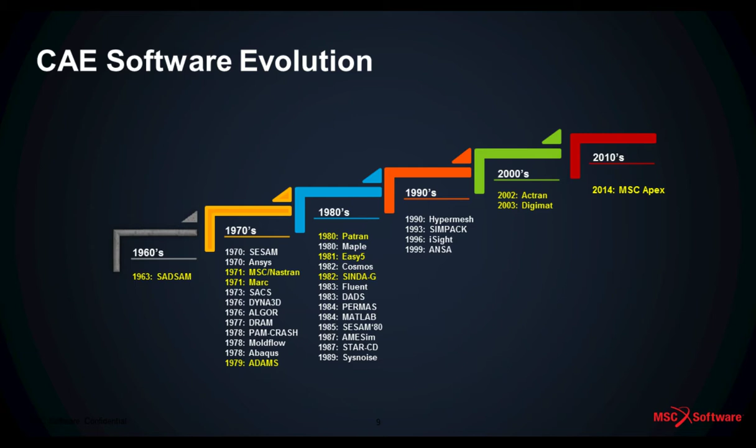So what we did was launch a worldwide trend survey. We went out to our customers—Ferrari in Italy, Honda, Toyota in the Far East, NASA, Airbus, Boeing. All these guys have been using our tools for 25-plus years, and we said, tell us two things in 13 different languages: what you like about our software that we should keep, and if you were to create a wish list of what the best possible finite element analysis software would be, no matter how crazy, tell us what it looks like and how it works, and we'll do our best to build it. We got a very passionate response in 13 or 14 different languages worldwide.

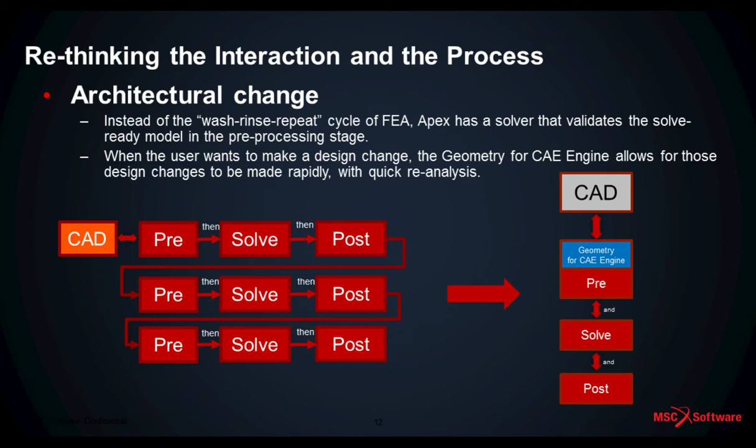Okay, and that's really what Apex is. The moment you bring in CAD into Apex, it automatically knows the location of every hole, every line, every fillet, every surface, everything. And it knows the dimensions of everything, which makes it completely generative. The moment you assign a mesh to it, the mesh optimizes for the geometry, again, without you even having to do anything with it.

And these are the things that you can leverage modern day computing for.

Now, this is not our first release that we've had. We have been waiting for the product to get to a maturity level where we could really reach out to the oil and gas and offshore industry and say, you know what, if you build a large fabricated structure, this is the tool for you. And sure enough, now we are there, and hence why we're giving you this webinar today.

The beginnings were really that modeling and meshing portion, that really big pain point of, you know, I'm paying my engineers to do engineering, not modeling. That was the first couple of releases that we focused on. And even within that, we focused on the 2D mid-surfacing and meshing, shell meshing workflow.

The next complaint that we addressed over the course of 3 releases was, all right, why am I paying my engineers to do a basic linear static or normal modes analysis and it takes weeks? How can you turn that down to hours or at the most a day or 2? And we said, okay, you know what, we could do that too. And sure enough, we did.

And so here we are now that we have an entire suite of analysis tools capable for you. We have linear dynamics, we have linear buckling, we have interoperability with Nastran, and we have composites, we have orthotropic materials, basically anything you would need for a large fabricated structure we have.

So what is Apex Modeler? Apex Modeler is the CAD to mesh solution. This is the pre-processing standpoint. We license it two different ways. We have Apex Modeler and Apex Structures, so it's a little bit cheaper if you just do the pre-processing portion of it, and then you can move to whatever solver you choose.

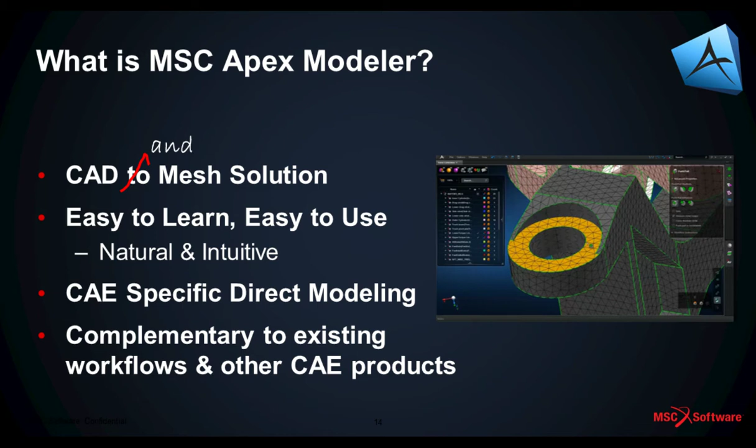The biggest takeaway from this slide is that Apex is easy to learn, easy to use, natural, and intuitive - 4 things that have traditionally never been associated with finite element software before. If there's one takeaway from today's presentation, it's that James is far too excited about finite element analysis than any other human probably should be. But the second takeaway would be those 4 things: Apex is easy to learn, easy to use, natural, and intuitive.

One of those things about being easy to use and easy to learn is the fact that Apex is completely self-taught. There is no training class associated with Apex. You pick it up, and within hours you're off and running, picking it up yourself. Me personally, I came from Altair, and I came from the HyperMesh workflow where you took 2 full-day training courses just to learn what the left mouse button does and the right mouse button does.

And we said, okay, let me put this to the test. Within 4 hours, I was ready to go. And part of that is the fact that we have smart tools. The moment you see the demonstration today, you're going to see that a vast majority of tools are gone - they've disappeared because we've integrated that technology into Apex.

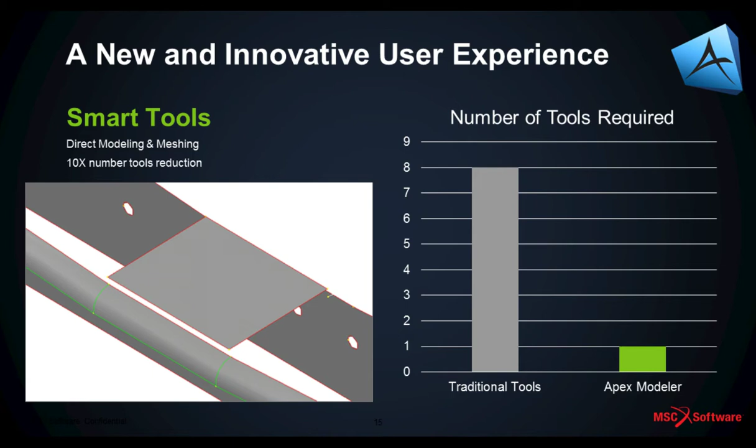In the image you're going to see here, what happens when you join those 2 red lines to get that fillet connected to that top surface? That traditionally took 8 different tools in our legacy tool. We said, let's throw down the gauntlet here, let's figure out how to make that faster and easier. And sure enough, we did. In Apex, it's just a drag and drop operation. So 8 tools down to 1 - a 10 times reduction in the amount of time necessary.

Now, Apex is self-taught, I already told you about that. Let's put our money where our mouth is. We went out to our customers worldwide and said, let's put this to the test. Here is an audio package - what you're seeing is a plastic enclosure for 15-inch subwoofers. So you can imagine there's a lot of vibration, a lot of structural loading that goes through this thing, and cracking and consumer product quality is of utmost importance to this customer.

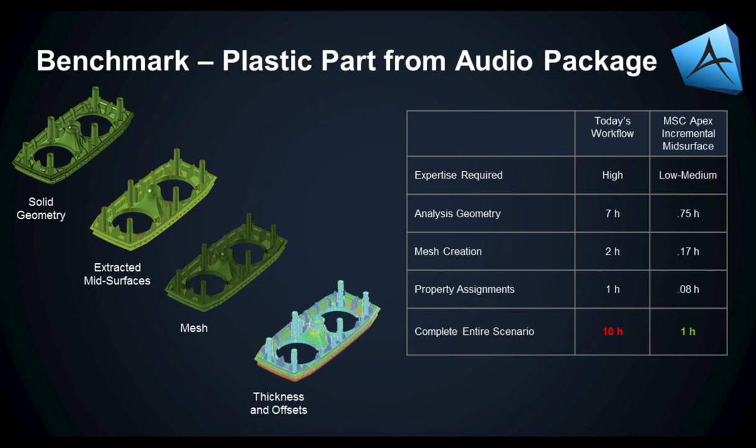We said, if you were to build a mid-surface, how long would this take you? For their best engineers, it took 10 hours. In Apex, it took 1 hour. So there's your 10x return in pre-processing time.

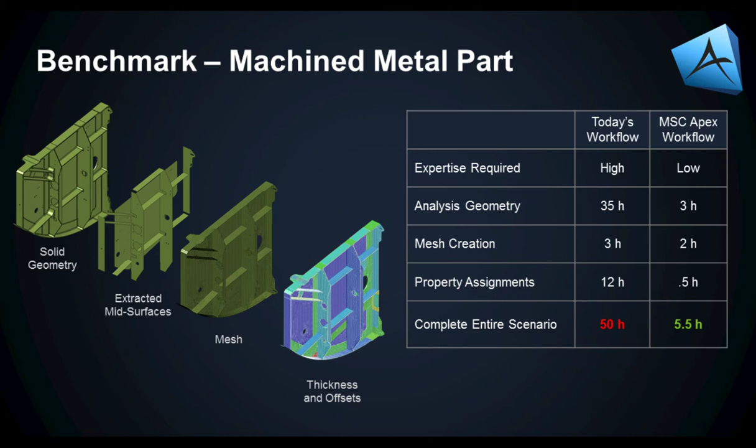Here's another example - this is a machined metal part for one of our customers, where you go from solid geometry to mid-surface. This took over a week in their current workflow. Switching over to Apex, it took less than a day, almost half a day.

Now, you may be thinking, what does this pre-solve-post workflow look like? Well, we import all the major CAD formats. We also import Nastran legacy bulk data files. But when you're making geometry changes inside of Apex, testing your engineering intuition and whatnot, you can go directly into the bulk data file, or you can spit out your changed CAD format in ACIS, Parasolid, or STL, and go right back into your CAD format to do the full loop.

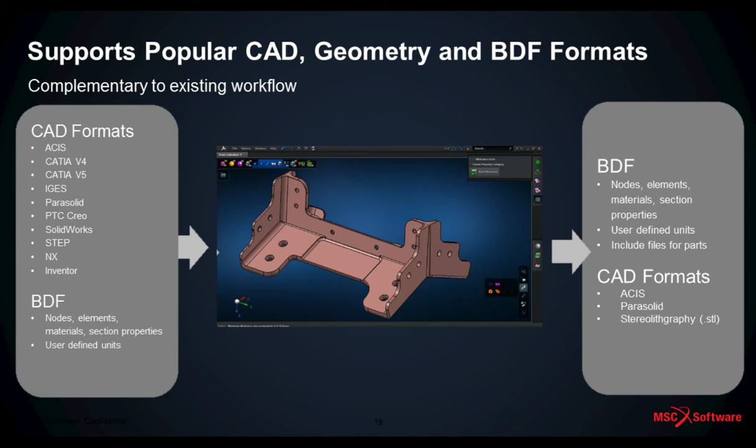So let's say you added a rib, changed a fillet, or moved a fastener hole in order to make your structure more structurally sound. You can go right back into your CAD system, change your drawings, and go straight out to the manufacturing floor with that changed design - so you're not locked in within the Apex platform.

Now, Apex Structures is that second half - that is the solver and post-processor. This is where you can really test out your engineering intuition and see back-of-the-envelope loads and calculations in a matter of minutes instead of hours or days.

The 4 technologies we have today available - new stuff is coming out almost every day within the Apex platform - are linear static, normal modes, linear buckling, and linear dynamics. It's completely integrated and generative, which you'll see part of the demonstration today: going back and changing the design after an analysis has already been done, which we do on the jacket assembly.

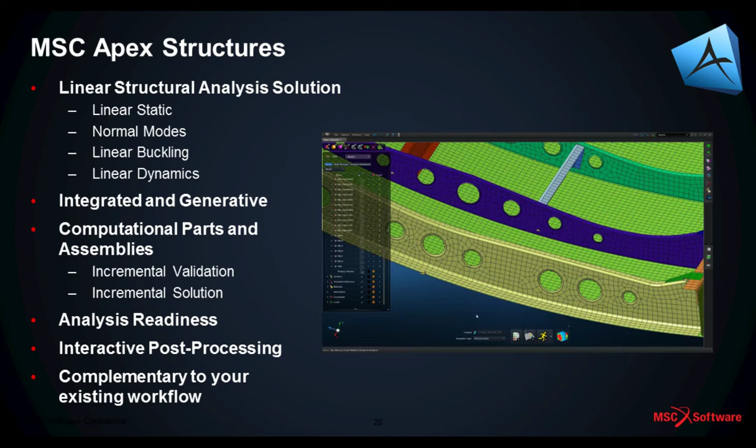Computational parts and assemblies allow for that generative and integrated platform to work because you have things like incremental validation and incremental solution. Gone are the days where you cross your fingers after spending weeks building a model, hoping it actually runs, then spending 2 or 3 days debugging your model just to get something runnable. You don't have to do that anymore inside of Apex. In fact, that was one of the things we set out from day one to fix - incremental validation and incremental solution. It's so easy that you'll see in the demonstration, and you'll really love it.

And with that, let's go straight into the demonstration.

For the first demonstration, I'm going to show you a little bit about the Apex platform before we jump into the actual demo. The moment you open up the tool, you find this pop-up window with over 250 videos built in for every single functionality inside of Apex. Now, if you need video number 238, do you have to watch 237 videos first? The answer is no. This is really just there for reference.

Let's say you wanted to do a 2D representation of a 3D solid, or a mid-surface. All you have to do is hover over the tool, and you get a little synopsis of what the tool does, plus a video icon. Click on it, and it brings you directly to the filtered list of videos specifically connected to the mid-surfacing workflow. There you go, right at your fingertips.

Now that applies to basically everything. Let's assume you want to import some geometry and do some cleanup on it - you have the exact same capability. The idea is that at every stage, from the easiest to the most advanced analysis workflow, you basically have an MSC virtual assistant sitting on your shoulder, giving you tips and tricks along the way. At no point should you feel left out in the cold and all by yourself.

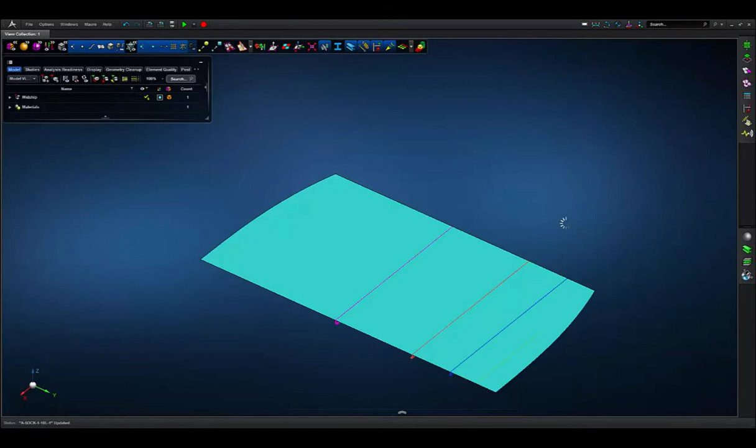So you can skip that stage in your finite element model building process. What we're going to do is play a macro that's set up to read in the two-part export from my Intergraph model. Going through this, for a section of my part, if I go to all files, you'll see IGES files that have been exported - these are my geometry pieces - and an XML file showing all the metadata, like the cross-sectional area of the beams and other details. If I go back to the ship Python script, it will bring in and associate all of that data, saving me time and effort from building it from scratch.

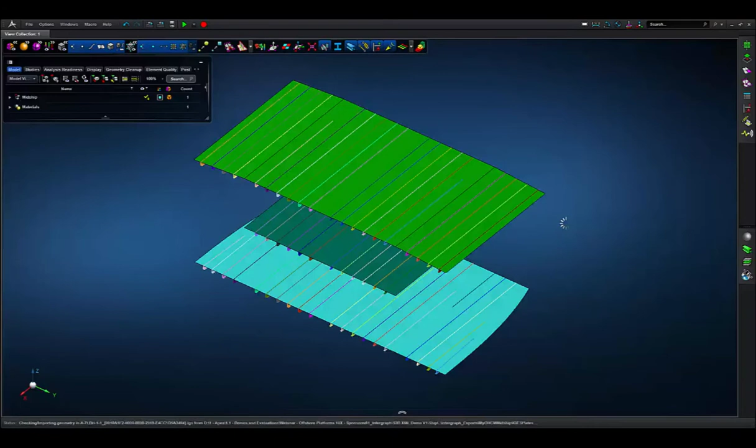While we wait for this model to work, I'll narrate and give you the play-by-play. This is creating a section of a ship, basically in the middle of what you'd think of as a freighter ship, something that carries cargo. What you're seeing are the horizontal surfaces, the sheet metal sections, stiffened underneath and on the side by 1D beam models. Both of those are used heavily in the shipbuilding and oil and gas industries, so this should be very familiar in terms of a finite element model build process. Apex excels at both 2D surface meshes and 1D beam meshes, so we thought this was a great example to show you that we handle both workflows.

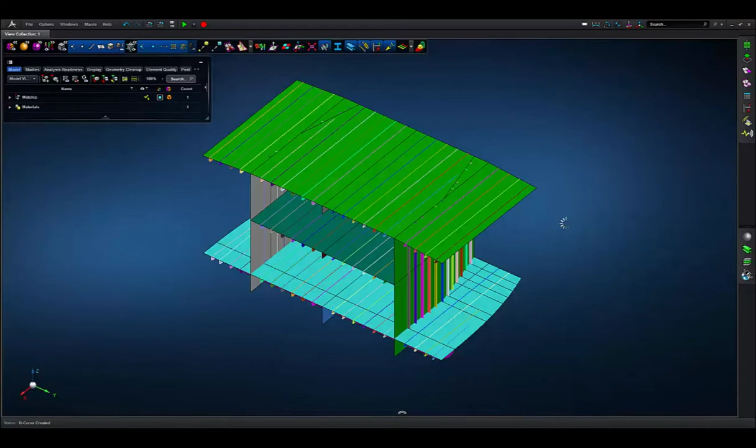I'll wait for this model to finish, and then we will go on to finishing up the model.

Due to the magic of webinars, we can just skip toward the end, and you can see that this Python script has successfully executed. I've just saved you the pain and anguish of hearing me tell jokes for the last couple of minutes.

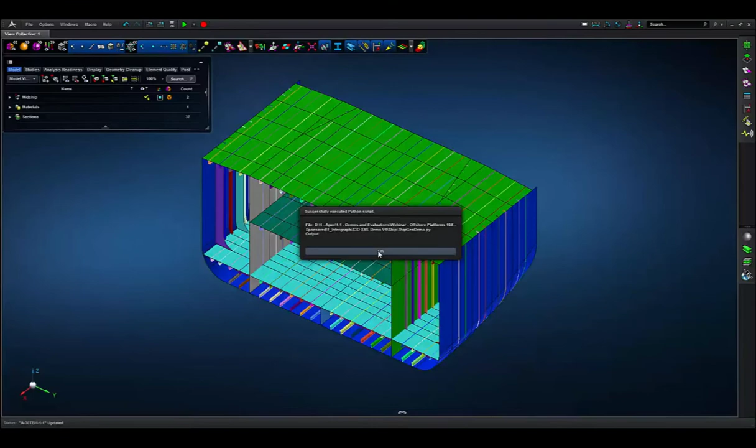The script itself only takes about 1.5 to 2 minutes to complete, and here is your completed ship hull section with 1D beams stiffening up the 2D surfaces for both the top and bottom and the sides of the hull.

The only steps left in this model building process are: first, we have to mesh it; second, connect all these pieces together; and third, assign boundary conditions. I'm going to skip that last step so we have enough time to move on to the rest of the demos.

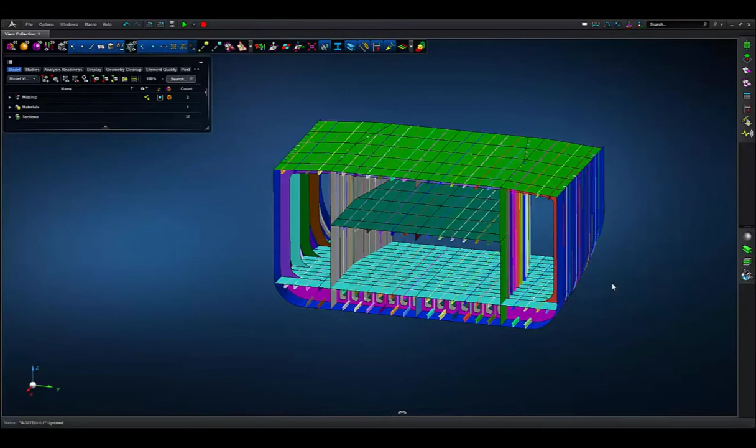I'm going to go into that meshing tool I showed before, assign a mesh of 0.25 meters, and drag a box around the entire thing. As I interrogate my model and zoom in a little, it looks like I've got a nice clean mesh.

If at any point I want to check the element quality, I can. I just go up here to element quality, and notice I have 0 invalid elements created, which means it's run ready right off the bat.

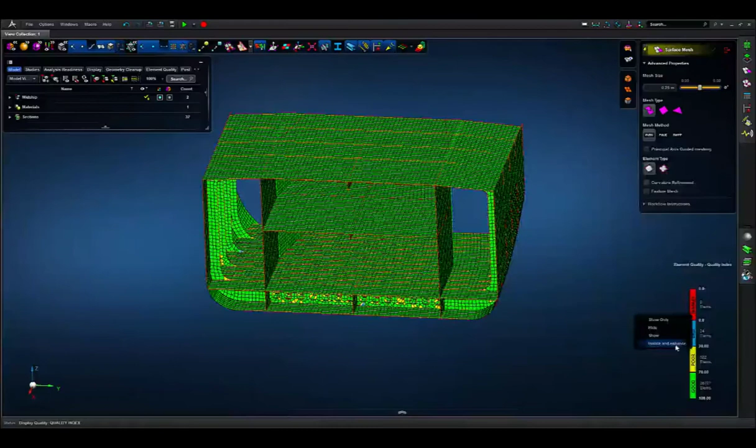If I want to see what the bad element locations are, I could do that too. I right click and say isolate and enhance, and it'll show me exactly where those bad elements are. But remember, this is completely optional because it's already run ready.

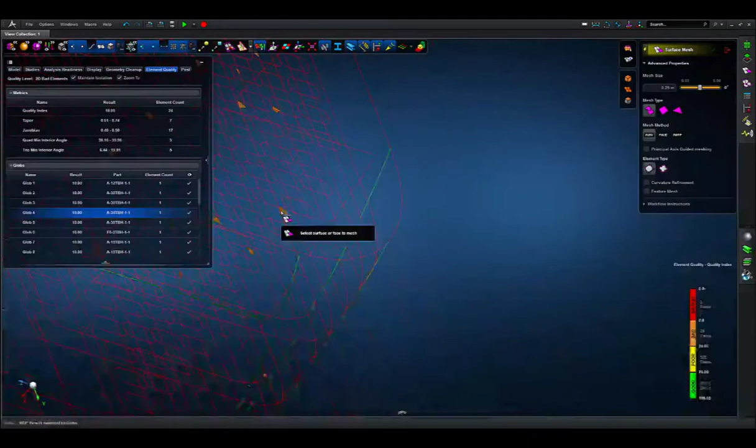If I do want to zoom to it, let's say I've rotated my model around and don't know where it is off screen, all I have to do is click through the list one at a time, see exactly where they're located, and fix them one at a time. We're going to skip this stage, but I wanted you to see that it was there.

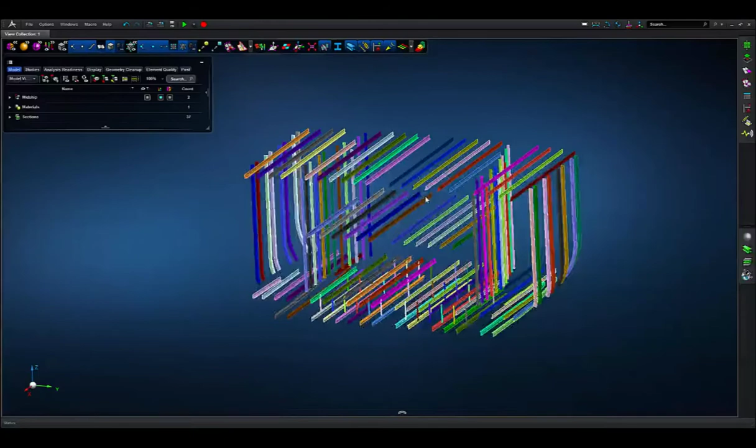Now, going back to this, the next stage is to assign the 1D beam mesh to the 1D lines, not the surfaces. Here you can see the beam spans have already been assigned to the 1D lines. I'm going to turn off the beam span so we're just left with the geometric lines.

I'm going to go back to the meshing panel and choose 1D curve mesh instead of surface mesh. Thankfully, they're right in the same place. Again, I'll use the same mesh size and drag a box around all of them.

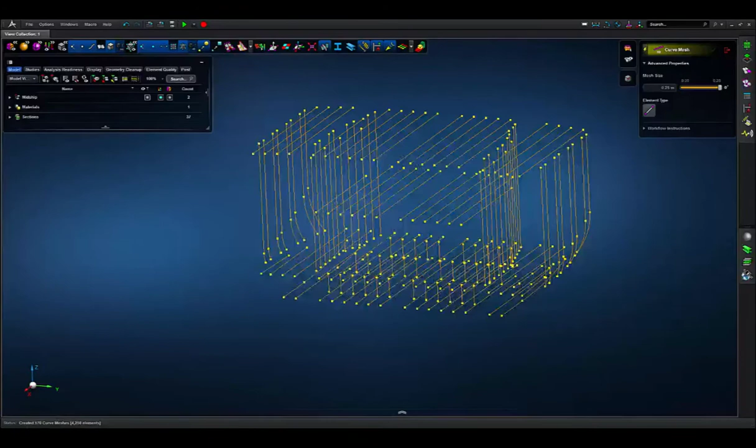Notice down here in the status bar it created 170 curve meshes, which also counts the number of elements associated with it. A nice feature of beam meshing inside Apex is that at every node location you have a cross-sectional fringe plot in post-process.

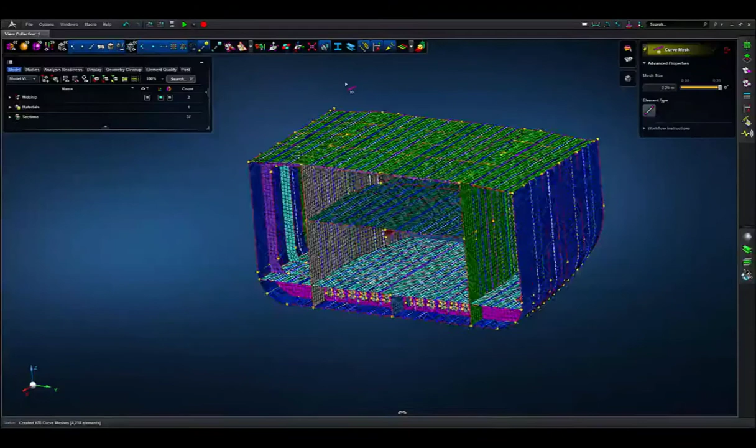The next step is to bring back our 2D surface mesh, and then connect all of these together. Now, this workflow causes considerable anguish for our users, but not anymore inside Apex because it's nice and easy.

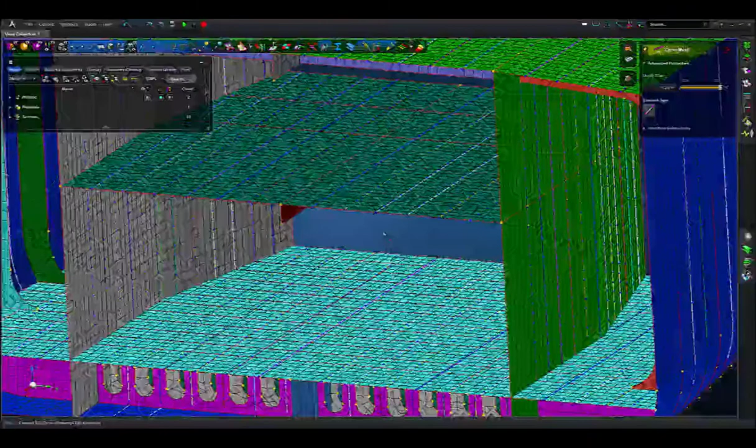Before I show you the easy workflow, I wanted to help you appreciate the effort we've gone into this. Anybody who's done this mid-surfacing workflow before understands you have to connect these one at a time to each of the surfaces, make sure they're all fully connected, and ensure all those T-junctions are correct so you have coincident nodes along every boundary. You don't have to do that anymore inside Apex.

Not to mention taking all these surfaces and beams and putting them into their own part file so it acts as one monolithic surface—you don't have to do that anymore either. You can leave it in the assembly structure you have, keeping all those sections and subsections attached to one another so you could run each sub-assembly independent of one another, thanks to Apex's solving capabilities.

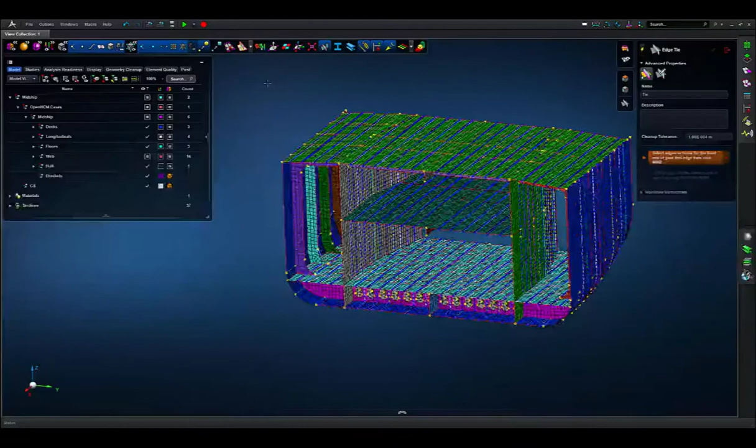Now I'm going to go to the Interactions tab, and if I go to Edge Tie, I'll drag a box around everything, and it'll automatically connect all these pieces together. This is a two-step process: first, select all the edges or faces of what you want to connect; second, select all the faces you want those to connect to. I'll let Apex sort it out by selecting everything for both sections, and it'll automatically connect it.

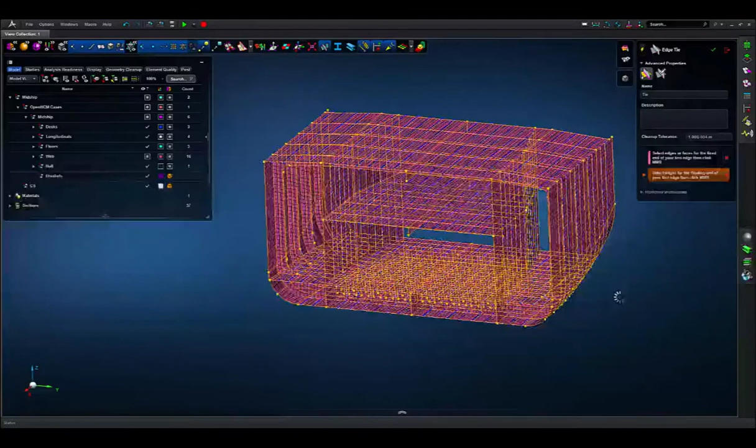As this is running, it is also editing the mesh so that it's coincident and lining up, moving each nodal location side by side so that it's nice and connected together. If I turn on my beam spans again, I can notice that each node location is lining up with the 2D surface meshes, and we are good to go.

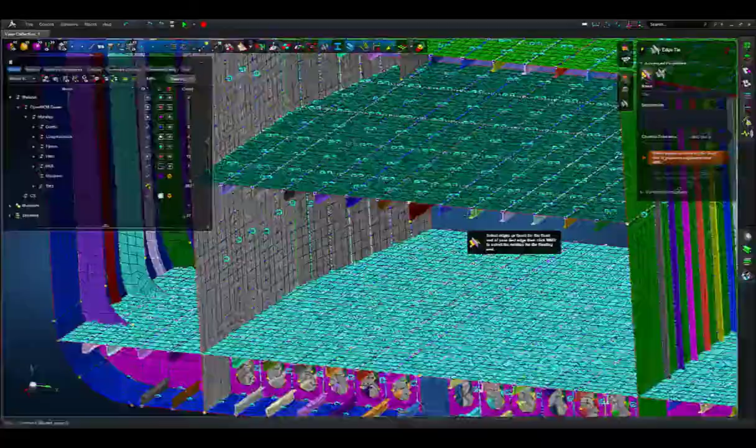All right, so now we are ready to analyze. The next step is to assign the loads and boundary conditions, and I'm just going to turn off the interaction markers here so that we don't have to look at those anymore. It's a little bit distracting to see all those little edge tie links, but that's okay. We can turn them on and off with a click of a button.

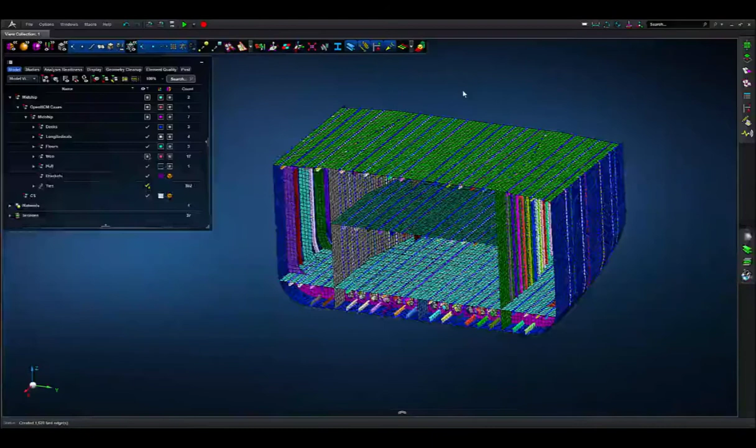Nice and easy. So the next step would be to go ahead and assign boundary conditions, which you can assign pressures, statics, gravities, dynamics, and anything that you want to do, and fully analyze at this point. So this first demonstration is complete, and we will move on to the jacket analysis.

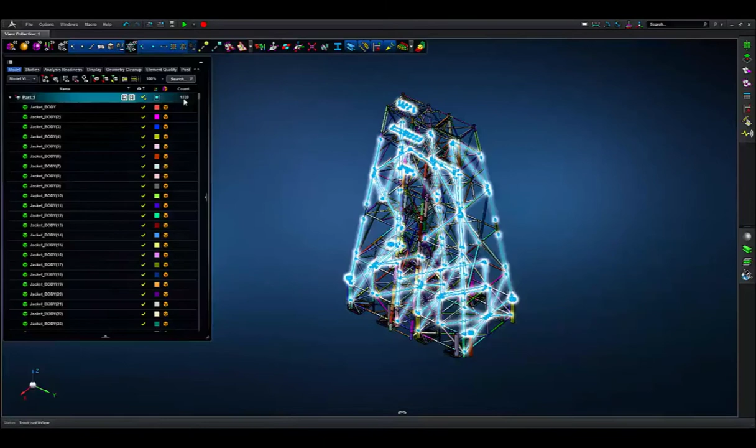Okay, so for demonstration number 2, we're going to jump into a jacket analysis, which is not without its complications. You can see that after I imported the geometry, I have over 1,800 parts here, and somehow this has to eventually act as one completely connected structure.

So the strategy that I'm going to take at this is build a little, solve a little, build a little bit more, connect that to the rest of the assembly and resolve it, and keep going until eventually I have a fully validated analysis of the entire jacket.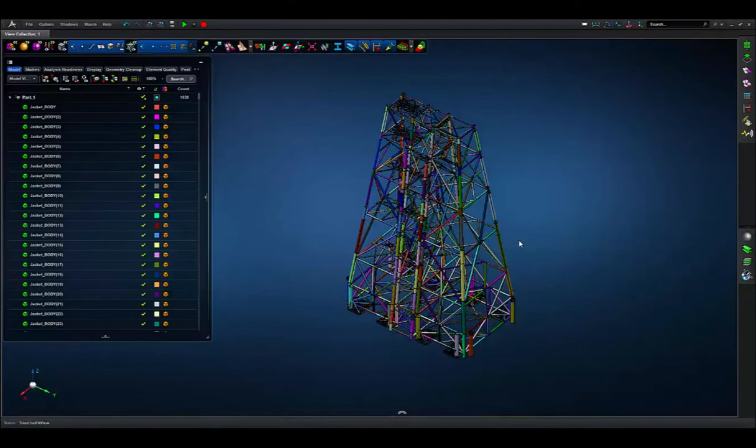So what I'm going to do is zoom into one of the more complicated areas here, where I have it looks like 1, 2, 3, 4, 5, 6 different tubes connecting to another tube, and somehow that's supposed to all connect and act as one welded structure.

So what I'm going to do is drag a box around it, and say show only, just so that we can focus on just that one section. I'm going to rotate around so that I can zoom into that location and kind of see the complicated nature of these things.

Now, the first thing I'm going to do is extract a mid-surface from these 3D solids, and there are 5 different options inside of mid-surfacing. Sure, we could do things like these are more for machined metal and stuff like that, and we can do incremental mid-surfacing, which works really well for injection molded plastic parts and castings and all that kind of stuff.

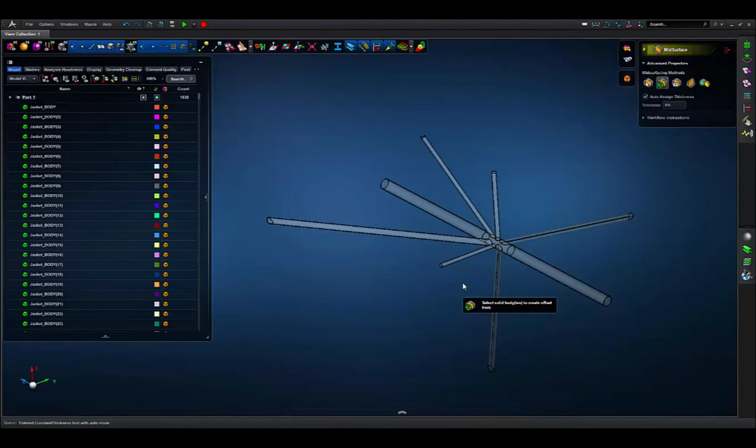But because these are extruded metal stock tubes, steel tubes that are welded together, we know that they're all supposed to be the exact same. And yes, we can click on them one at a time and notice what happens when we do. It'll extract the thickness and show the thickness range associated with that. But we're going to undo that.

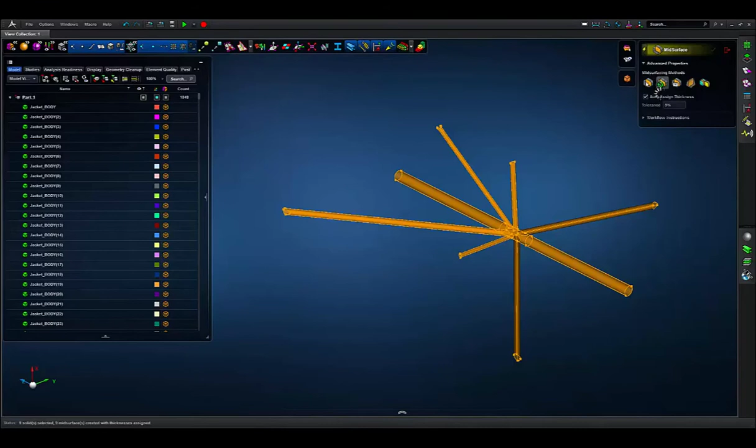Instead, what we're going to do is drag a box around the entire section here, and we're going to do the exact same thing where we auto extract and assign thickness. Notice that it just came up with 1, 2, 3, 4, 5 different values of thickness, which it looked like our human eyes deceived us, but the computer caught it. Nice job, Apex, by finding out that these are actually different thickness values associated with each of these metal tubes.

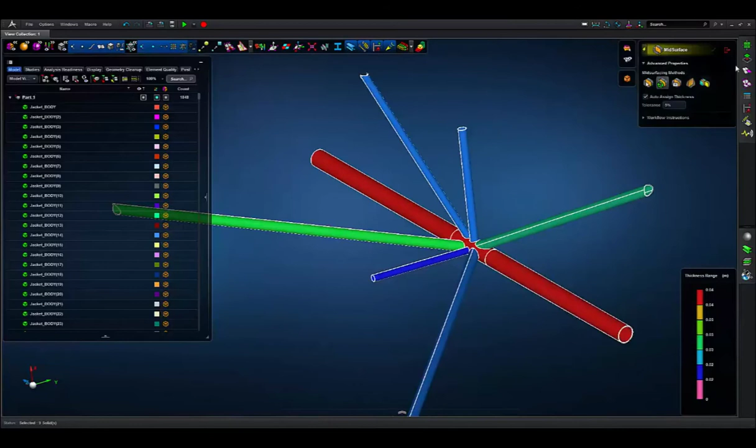So if we X out of mid-surface and we're just looking at the 2D surfaces, then let's move on to the next stage, which is connecting these surfaces together. So let's turn off 3D solids, and let's zoom in and see how we did.

Okay, so if we look at this, let's go into Vertex Edge Drag, and just like everything else inside of Apex, there's a manual method and a more automatic, quicker method of doing everything. I'll demonstrate both of them for you right now.

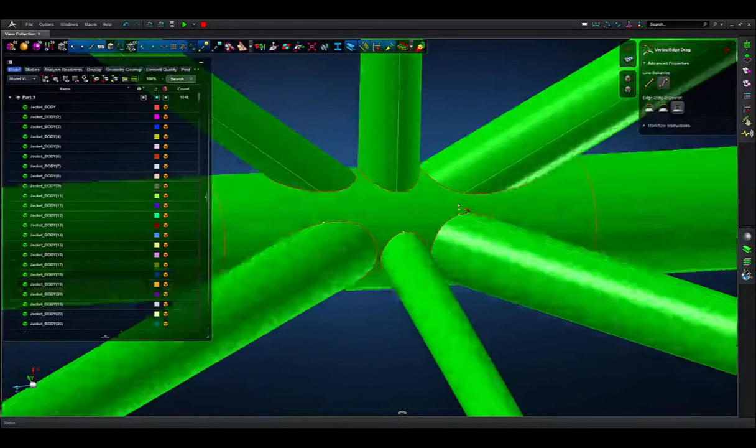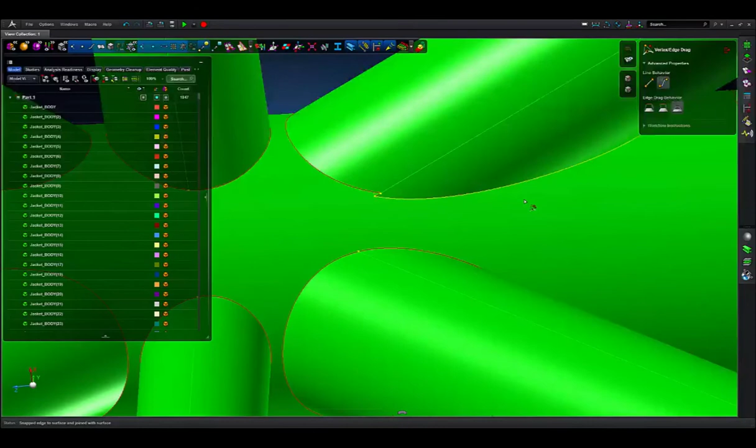So the more manual method is like, let's say you want just more hands-on control of what happens when you join one edge to one surface. Well, I'm just going to drag this edge down to the destination surface. Notice the instructions that I get right at the mouse cursor and the highlighted surface before I even let go of the cursor. Once I let go, notice I got a nice clean T-junction on that edge, and let's do the same thing for this guy over here.

And right there we have a nice clean surface in vertices. Now, that's the more manual approach. Now, if I undo that, everything that I just did...

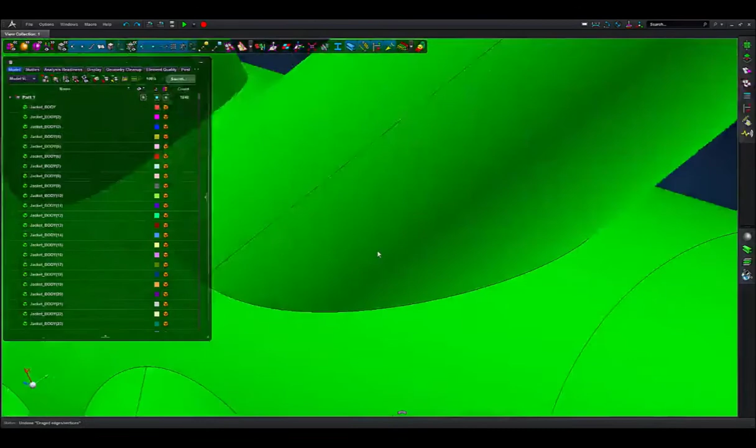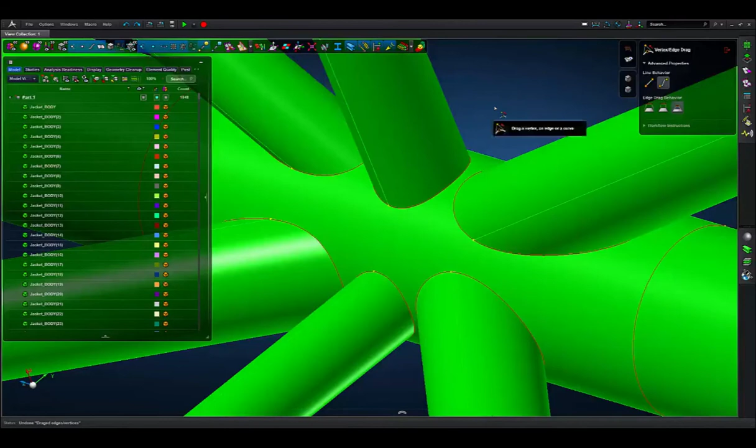I'm going to undo to where it's disconnected from both surfaces. There we go. Now if I go back into Vertex Edge Drag and show those free edges, just to validate the fact that I undid every step that I just did, Apex actually has up to 50 undos in a row, so that's quite nice. That's one of the niceties we get along with having a next generation platform built on modern day computing requirements.

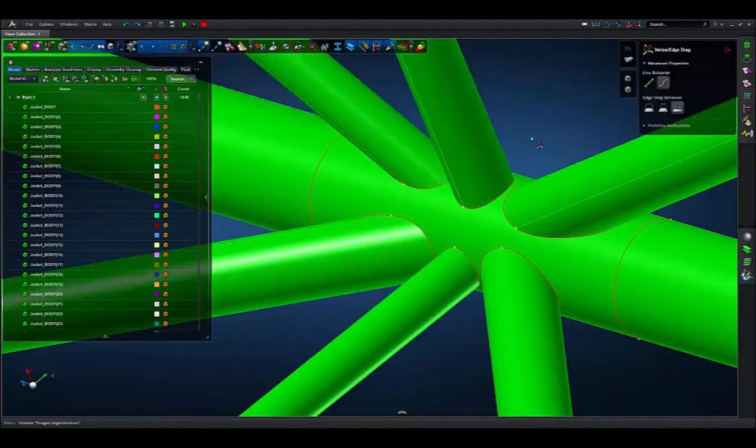So here we have Vertex Edge Drag, which is the more manual approach. Now the more automatic approach—if we had to do this kind of Vertex Edge Drag for every single surface and every single solid inside of this, over 1,000 parts, almost 2,000 parts in this assembly, we would die from old age before we were finished with this analysis.

So that's not the approach we're going to take. Instead, Apex has this extend surfaces feature where we can use specified tolerances and just drag a box around to see what happens.

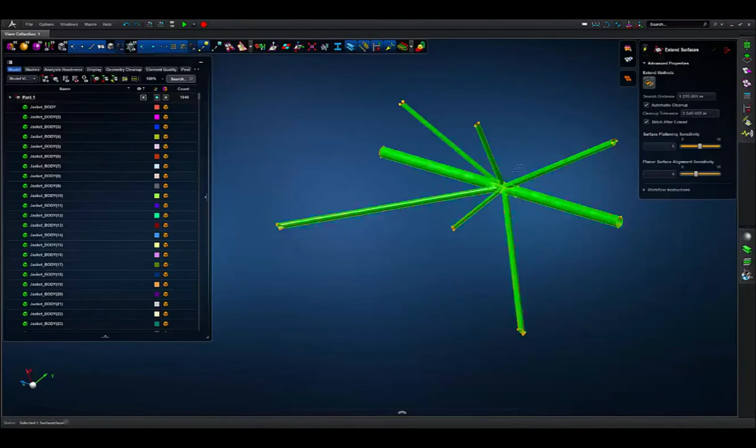Now if I drag a box around all of the parts inside of this assembly, this sub-assembly here, I'm going to zoom in and see how I did. Hey, look at that. Instead of doing every single one at a time, it even connected these as well. Now that everything's connected, the next step would be to mesh.

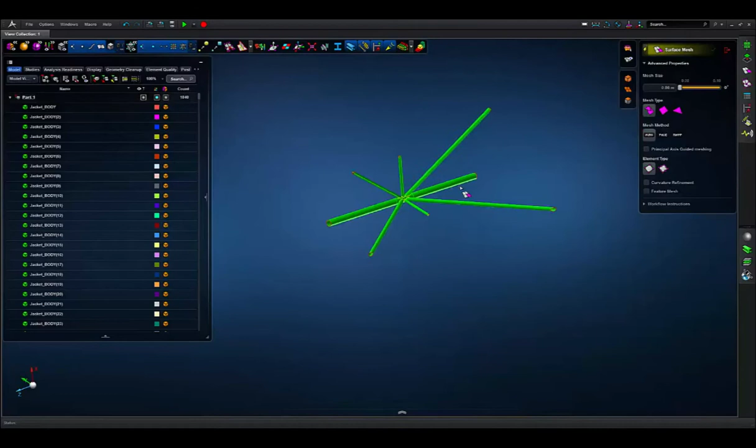And we're just going to assign a surface mesh. Now, I don't know how big this part is—let's assume I don't want to measure it ahead of time. I'm just going to enter a mesh size of 0, and Apex is going to measure my part and assign a mesh for me.

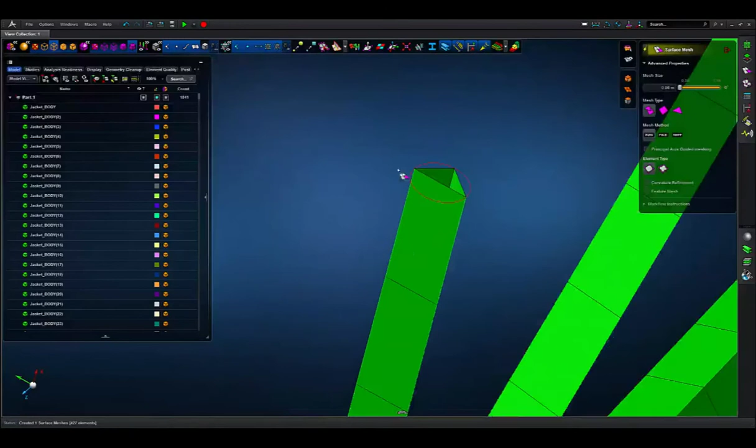So let me turn on the geometry in wireframe mode so I can see the mesh and how coarse or fine it was. Let me go to shaded, and I can see that's actually pretty coarse. So I'm going to measure the size of that mesh and do a little bit better job. Let's measure between one node and another node. It looks like 0.5 meter is the size they assigned automatically.

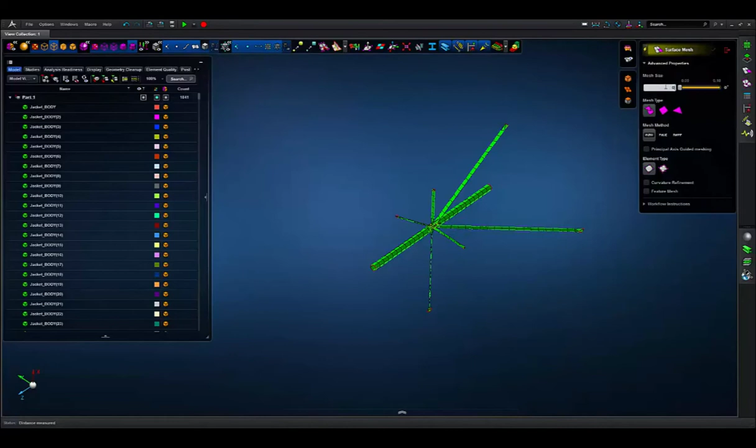So we say, all right, good job Apex, but we're going to do better. We're going to go back to surface mesh, and instead of 0.5, let's go to 0.25 meters. Okay, and let's just drag a box. Now we don't have to worry about deleting the mesh ahead of time. Let's zoom in and look at that—that looks a little bit better.

But the problem is we have to ride that fine line between good answers and taking forever to run my model, right? A model with this mesh size for 1,800 parts is going to take a lot longer than it would be to do this analysis with a more coarse mesh.

So let's just bump that up to say 0.4. Let's see what that looks like. Maybe that looks a little bit better. And sure enough, it does. Okay, so that's good enough for now.

So now that this part has a mesh, it's fully connected together. Let's go ahead and analyze this and see what happens. Okay, so what do we do? Well, we go to this part, we say center in browser. There is my part. I'm going to say, in this part, because I have a mesh, and that's the only mesh inside of my part.

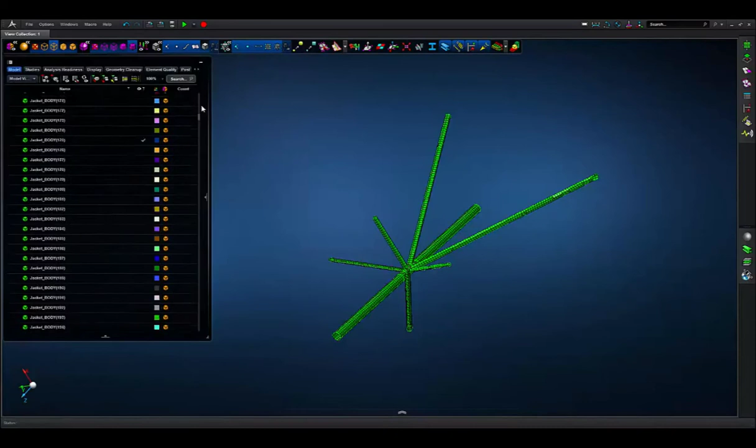So I can go here and say place an analysis scene. Now, because this is the only part in my assembly that has a mesh assigned to it, it will go ahead and analyze this before I'm done with the entire model. And again, I'm taking the build a little and analyze a little kind of approach for this model so I don't waste a bunch of time doing the wrong approach, and just kind of incrementally move through my model.

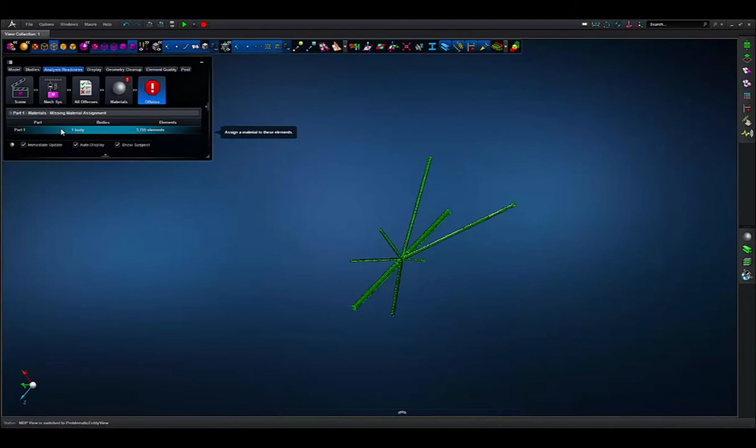So here it says missing material assignment. And it says, all right, well, thanks Apex, for not letting me waste all that time. So it says part 1 is missing, and 3,000 elements are missing it. So I go to my materials, and I go to my material list, and I say, okay, I just want to assign standard steel to that. And I'm just going to drag a box.

And sure enough, it's going to go back to my list of offenses. Now missing material assignment is not on my list. The only thing that's left is missing constraints and missing loads. Well, that's because by default, Apex sets it as static analysis.

Now, if I want to go to a normal modes analysis, I know as a structural analyst that I can actually get away with that because my first 6 modes are going to be at 0, which is kind of like a model checkout run, right? So notice that as I change it from static to normal modes, the very last error disappears from the list, and now I can click on my little running man. Okay, so let me just go ahead and click on run.

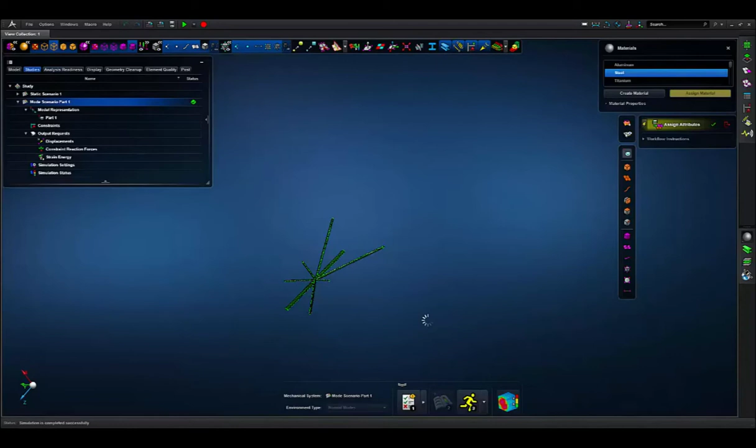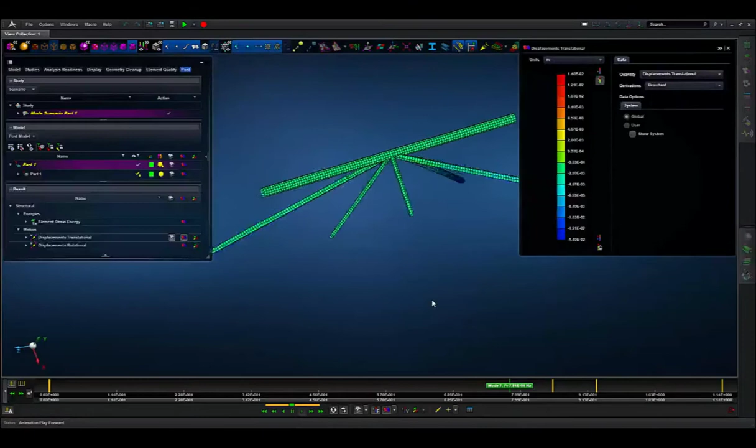All right, now that it's done, I can go ahead and click on post-processing. And I want to validate that my model is in fact connected properly. So I turn on fringe plot and I push play, and sure enough, everything looks like it's completely connected, which looks good. It actually looks like a little insect, kind of just wiggling its way around. So I'm looking at that. Things are looking good. I'm going to bounce through a few modes, and things are good.

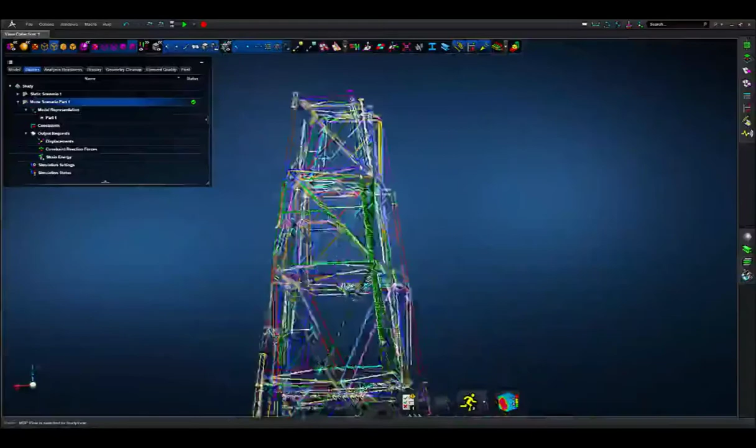All right, so now let's add on to this assembly, and let's move on to the rest of the structure, and follow what the rest of the workflow would be if I were to add on to this. So here I can see the section of the jacket that I've already analyzed, and let's go over to this section as well, and let's go back to shaded geometry so I can see what I'm doing here. So I can see that the next one is this section right here.

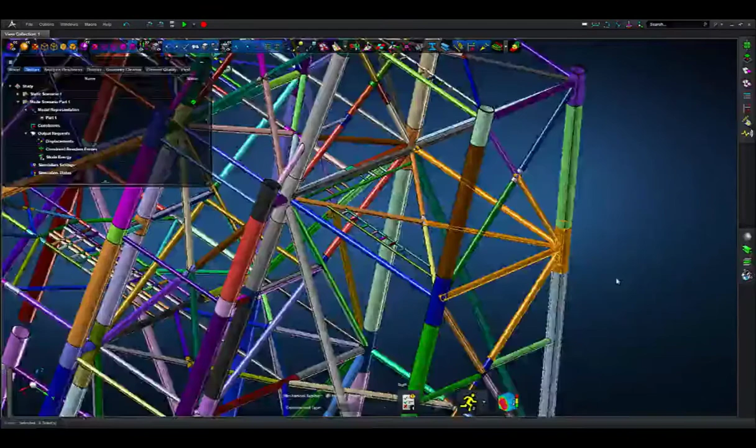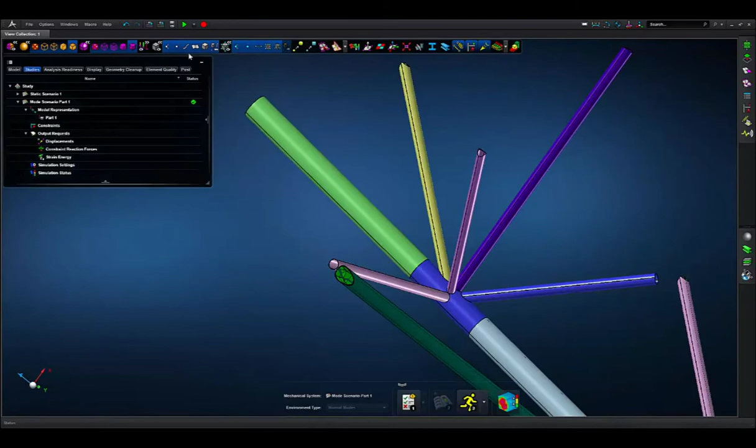So again, I will go ahead and say show only, but I'm going to add that to this section down here that I said show only as well. So I'm going to drag a box around that as well, and I'm going to say right click show only, and it's going to show me the assembly that I built before, and it's going to show me the section that I have not analyzed yet. So let's turn off the surfaces and the shells.

And let's go into and do the exact same thing that we did before, but we're going to go a little bit faster this time. So let's go to auto assign thickness, and we're going to drag a box around the parts that we have not done yet. And now thickness is assigned, so we're looking good.

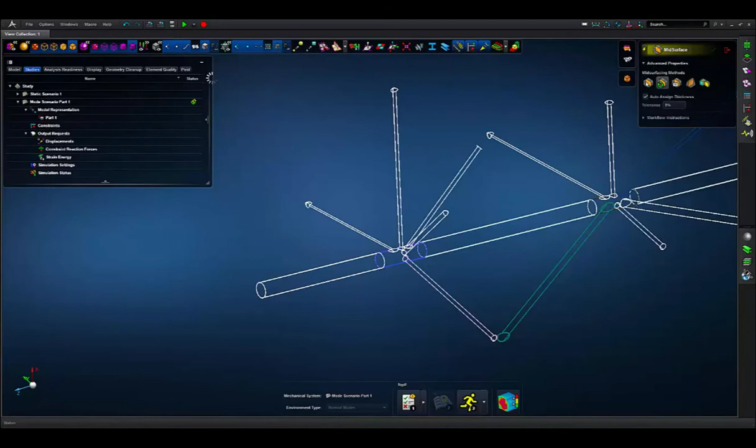Let's go back to assigning a mesh to that. Let's turn off the solid geometry and let's turn on surfaces. There's the rest of our mid-surface. Let's turn on the shells as well, just so we can see the mid-surface, or the mesh assigned to it. We can see the part that does not have a mesh assigned to it yet.

Now I can be very careful about this and mesh only the parts that I'm missing, or I could just go ahead and drag a box around everything. Now, notice that I am meshing before I connect it this time, because I just wanted to demonstrate what happens when you actually do it that way - there is no right answer in terms of the step-by-step process inside of Apex. It's very agnostic when it comes to the step-by-step process.

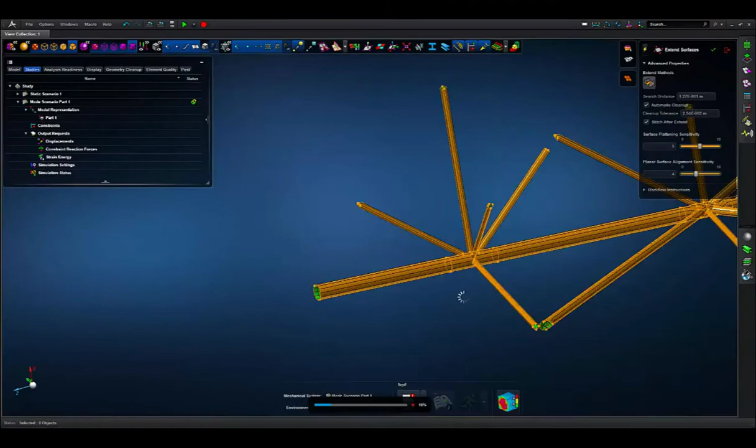So let's go back to extend surfaces, and it remembers the same tolerances that we had before. So I'm just going to drag a box, and I'm going to connect it up. And there you go. There is our next assembly that we are ready to analyze.

So we again go to materials, and we could assign that same material to the rest of the part, and we are ready to reanalyze. So we go back to our model, and we are now ready to analyze just this substructure. Now, this same process goes through step by step by step, and eventually we get a fully completed jacket.

Now, do you have to do one little subsection at a time? No. You can take bigger chunks. But the purpose of this webinar was to show you the step-by-step process that Apex walks you through at any point in time. At no point during the Apex solution time are you analyzing something, crossing your fingers, hoping that you're going to get an answer, and then you get an error. No point in time does Apex give you that workflow. So that's a thing of the past.

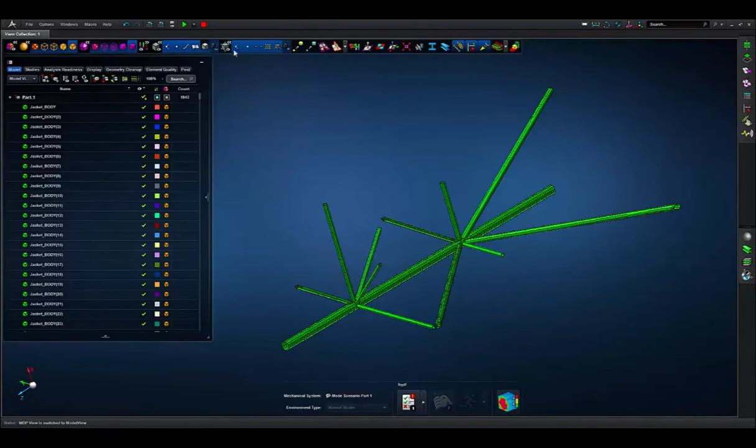So hopefully this second demonstration has been useful to you, and you can see how it applies to the rest of your jacket assembly or whatever large fabricated structure you may have. Okay, thank you very much.

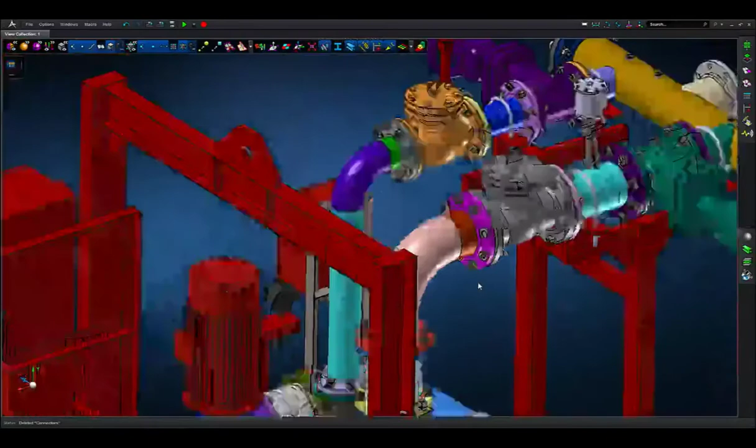Now for this third recording, we're going to work on an assembly that would be very familiar to an oil and gas engineer or a petroleum engineer, where we have castings connected to extruded steel tubes connected together via lots of fasteners, lots of bolts, and it's all sitting on top of a welded base and frame structure that is welded together using sheet stock.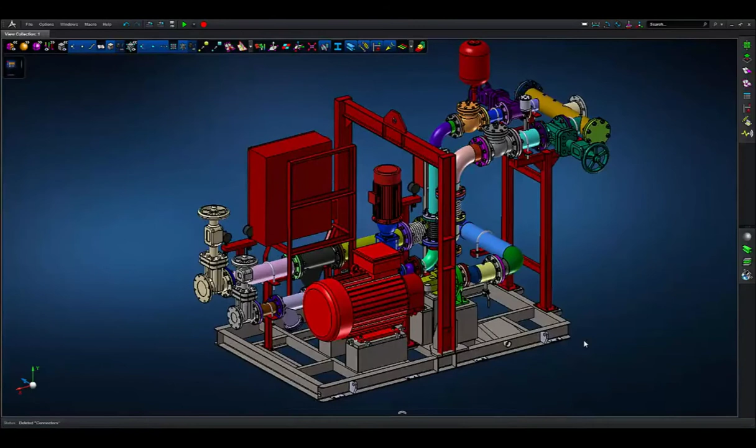So the first thing that should jump out at you is how many fasteners are in this assembly, and that's what we're going to focus on today. But this entire model can be completed in a matter of hours, from initial CAD all the way through final assembly and analysis.

I've skipped the step of doing the mid-surfacing and meshing that we did in previous demonstrations, and instead we're going to focus directly on the Python scripting.

I'm going to turn off the solids and just turn on the mid-surfaces to show you that I've created this set of mid-surfaces that are 2D representations of the 3D geometry. I've assigned a mesh to each one, and notice I have nice clean washer meshes around each of the holes, so the fastener calculation answers and the stress around those fastener holes will be pretty accurate.

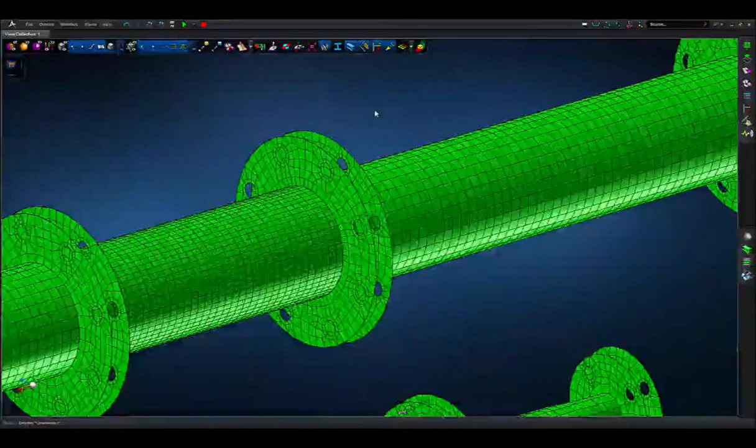Before I engage the Python script, I wanted to give you a little background on what the API is and how it was designed.

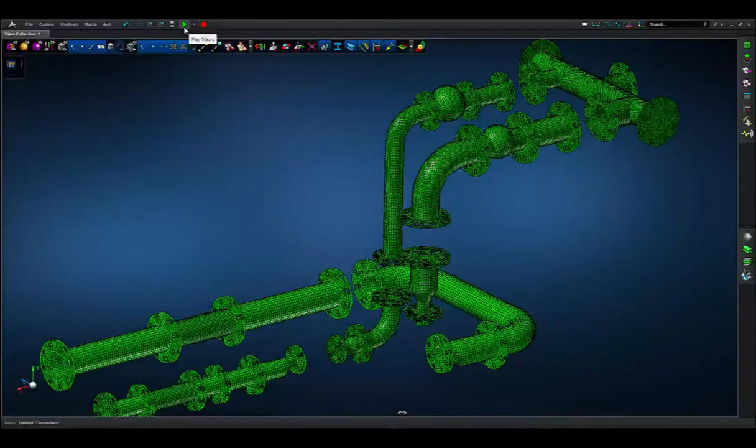Up here in macro, we have the ability to record a macro, play a macro, and find your recently stored macros. We also have play, pause, and record capability. If I hit record, notice what happens — watch, I'll browse to my desktop, create a test Python script, and hit record.

I'm going to do this the old-fashioned way by creating a fastener by hand first, and then we'll see how it turns into the full Python script.

If I go to connectors, then to flexible links, notice I have 5 other choices besides flexible links — springs, dampers, combo spring damper, bushings, and rigid links. Each one pertains to certain types of fastener calculations that different engineers want and need, but altogether it pretty much encapsulates all of them that are out there.

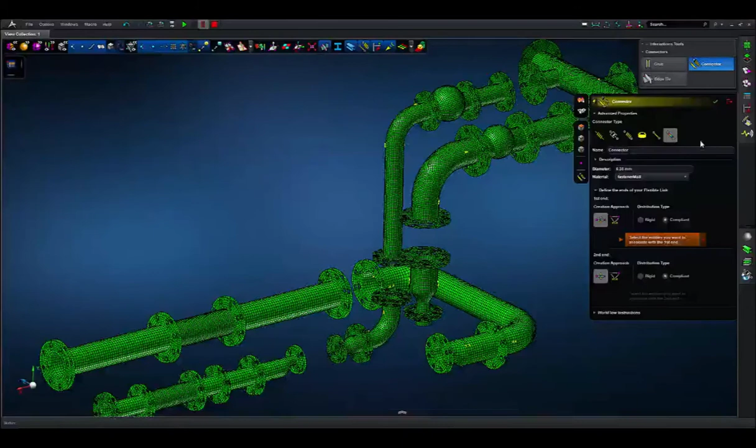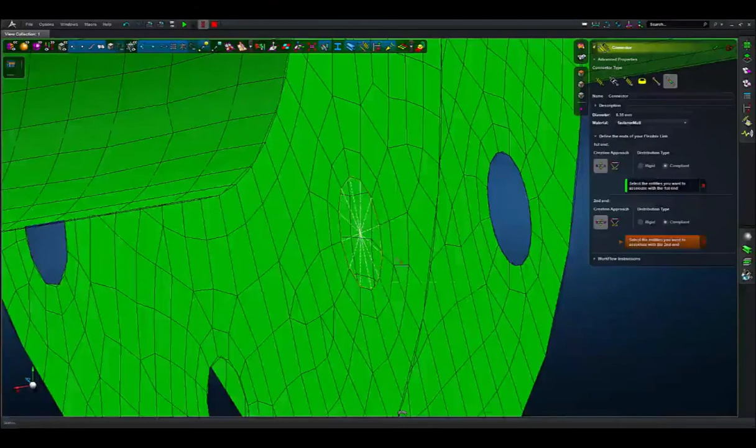Here, if I go into any arbitrary set of holes, I'll use this one right here. Notice I have 2 holes pretty close together, and I'm going to create a fastener between each hole. I click on the inside edge of this one — notice it gives me a preview before I even create it — and then I click on the inside edge of hole number 2, and it automatically creates and lines up that fastener in between both holes.

So here I have a nice little axis for that fastener, so I can see the longitudinal fastener force and the shear force as well, so I can make my fastener calculations when I'm fully analyzing this and looking at the answers.

Now, this alone is a pretty nice time-saving procedure, because it saves you the need to create spider elements on the other side, and it saves the time to create the bar or beam element in between both center nodes.

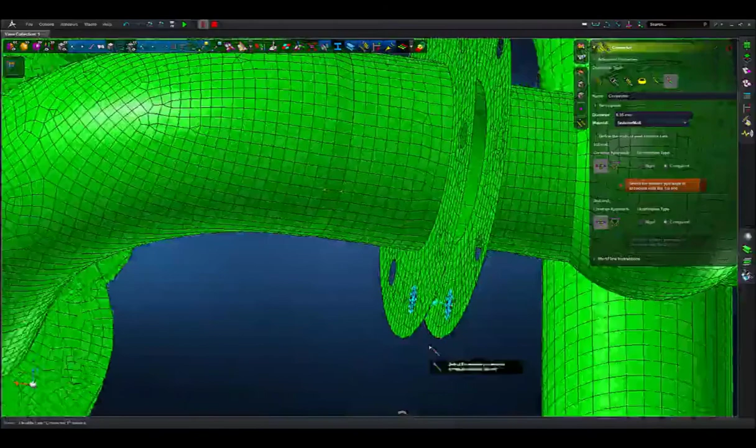But it still doesn't address the problem of having hundreds of these other fastener holes in just this small subassembly. Most oil and gas engineers would look at this and say, I've got assemblies 5 to 10 times as big as this, and yes, I spend days or even weeks working on these kind of models, and anything that would speed this up would be really nice.

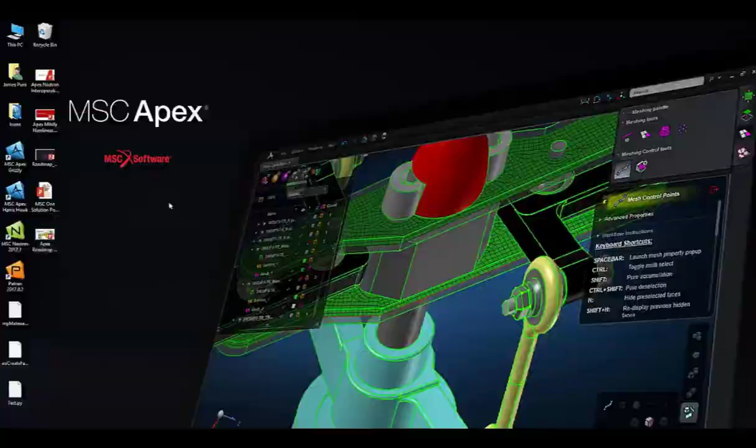Well, notice I'm still recording, by the way, by creating that fastener. So I'm just going to stop. And if I minimize this and go to my desktop, I have this test.py Python code that, if I open it up, has recorded and turned it into a fully runnable Python script.

Notice those are my connector properties that I just defined, and there's my connector that attributes the connector to the geometry — it's a fully runnable Python script right off the bat. Which is nice, because I don't have to know Python in order to utilize the Python API, which is by design.

So this is nice. Let me say that one more time: you do not need to be an expert in Python in order to use the Python API.

Okay, but in order to create something where it does a little bit more detailed stuff, you kind of need to know a little bit of Python to figure out how it works, in order to edit this to the point where it will search for the rest of our model and really automate this Python scripting exercise.

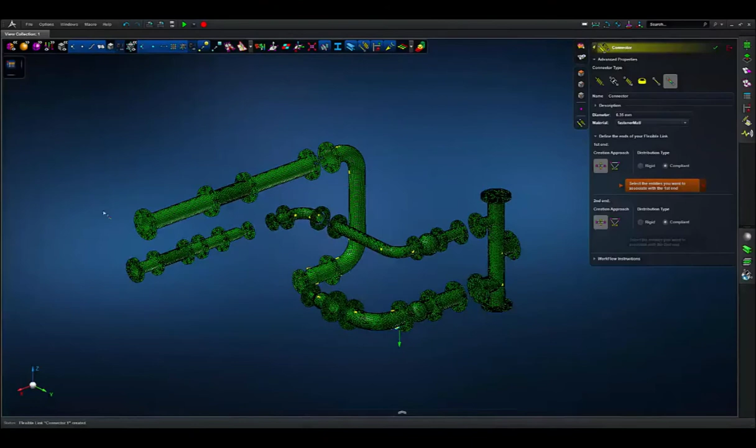Okay, so here I'm actually going to hit undo for creating that fastener, and instead I'm going to play a macro that we have started with what I just demonstrated for you, but due to the magic of webinars, we've done a little bit of work behind the scenes. I'm going to play a macro that we created that automatically searches the model for pairs of holes within a specified tolerance. It makes sure that there's a mesh attached to them, figures out what the longitudinal direction of that fastener is going to be, and it assigns the material to the fastener. It connects both parts together, and it just automatically goes.

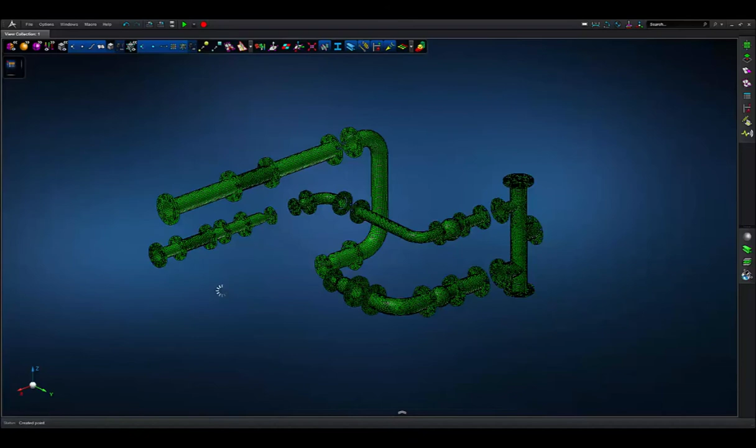So I'm going to wait for the Python to fully execute, and we will check back in when it's complete.

And there you go. Now you can see that the fasteners are being created, and they're being aligned based on the longitudinal axis of both of the holes, and the center lines lining up. And just like that, we're almost done.

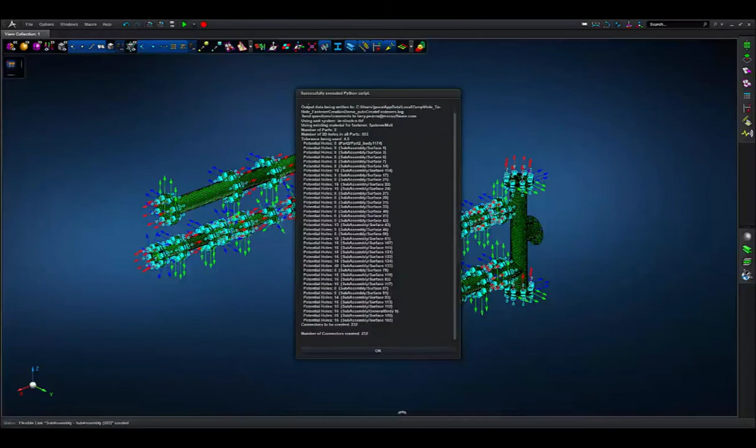Now once the Python executes, we're going to get a summary, and there it is. You can see the number of parts that were connected together, the number of holes that it searched for, and then the number of connectors right at the bottom here. It created 232 connectors in a matter of seconds, which was quite nice.

So there you go, there is the Python API capability, and this is just scratching the surface of what the Python API is capable of. So hopefully this got your imagination running, and now you can see how to apply this to your own structures.

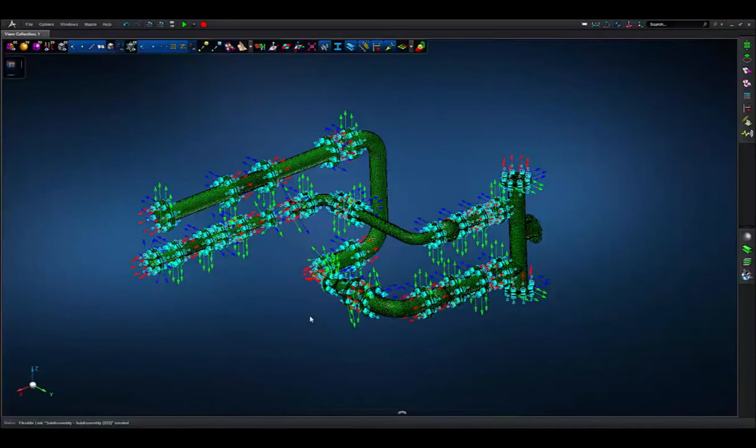Okay, so at this point, this is the last demonstration that I had for you guys, so we're going to switch back to PowerPoint now and close out the webinar.

Okay, so thank you very much for watching the demonstrations. Hopefully they were applicable to your workflows. Just in review, what we just saw was integration with Intergraph. So if you use Intergraph for your large structures, offshore structures, we have developed a script that just brings it right in, and you can analyze your finite element model just lickety-split.

Now, demo number 2 was the jacket analysis. So if you guys do offshore structures with large fabricated members like that, you can leverage Apex's incremental workflow where you can build a little, analyze a little, and then just move on. Again, that reaches that holy grail of analysis, which is you push solve once and you get answers once.

And then number 3 was automation of fasteners and scripting. So if you do pipes and fasteners together and that's causing you a lot of grief, this was just one demonstration of what the power of Apex's Python API is capable of, okay?